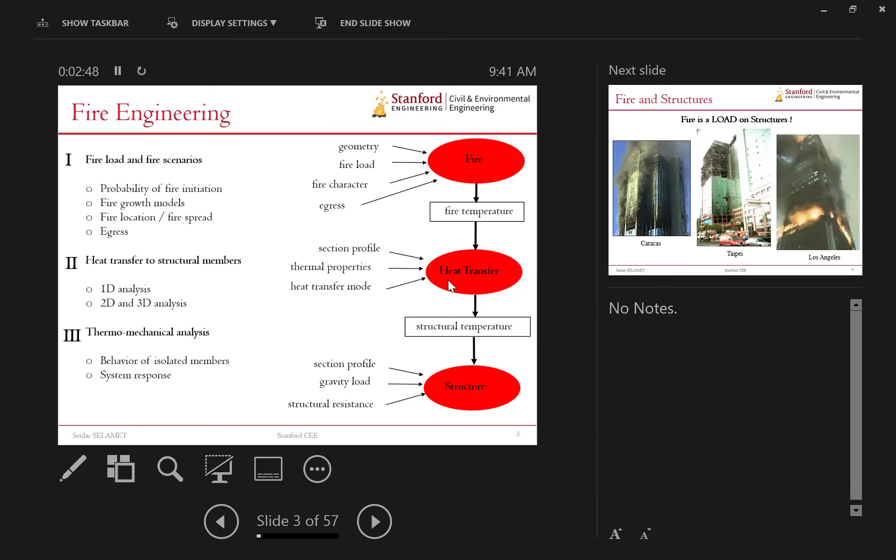So first of all, fire is a load on structures. Here are some examples of high-rise buildings. It doesn't just cause non-structural damage, it actually does cause structural damage. It doesn't happen too often, but some of these buildings end up being demolished, and it causes a big problem unless we do our knowledge check ahead of time. And what do we do about this?

Traditionally, if we think the material is vulnerable to fire, such as steel, and in this class I will be focusing on steel only because the examples will be on steel beams, we protect it against fire. How do we protect it? We make sure it's covered with a material that has very low conductivity and very high specific heat. That means it absorbs the heat but doesn't transfer it into the load-bearing structure.

But we obviously cannot do this forever. We have ratings. We can keep the temperature of the structural member below a certain threshold for 30 minutes, 60 minutes, 90 minutes, or 120 minutes. Those are usually what we call the fire ratings. We cannot do it forever, but we can delay their temperatures from elevating, even if the environmental temperatures are at quite high levels.

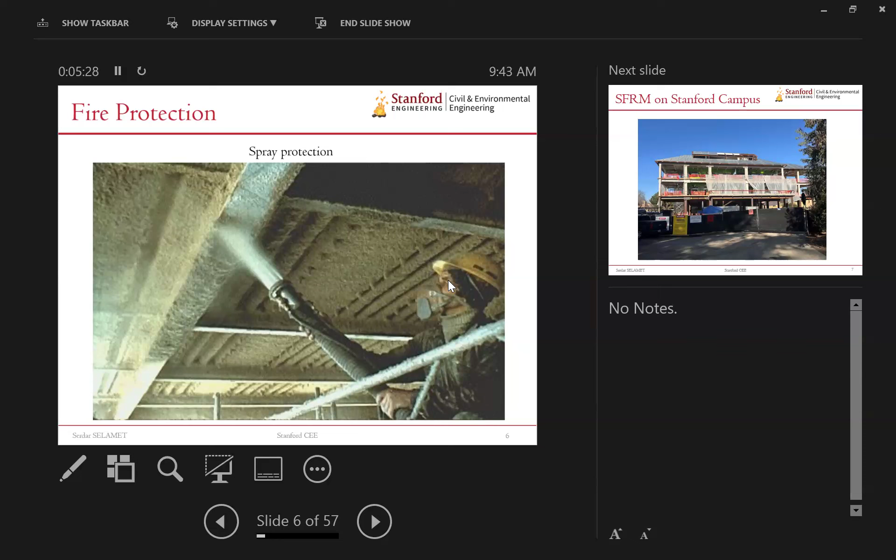I think it is this. It's nearby the Green Library. You'll see that spray protection is applied. So you can see the second and the third floors. The spray applied protection is applied to the steel members. The first floor, I'm not sure why it's still not protected. Maybe there's another occupancy type that they're thinking of, and they might apply something else there, or maybe it's just in the process. But it was a good opportunity for me to take this picture while you can see the differences. So one is a bare steel, the other one is spray applied protected steel.

Here's a zoom up to this. So you need to make sure that you measure, because you're just spraying. So you have to make sure that you're accurate with the thicknesses of that spray. It pretty much hardens right away, but it's still a semi-fluid, viscous material. So you need to make sure that the thickness is pretty much uniform across the board. And these thicknesses are determined by us, structural fire engineers. Knowing what the fire load is and what the fire rating is, we need to determine how much thickness we have to apply.

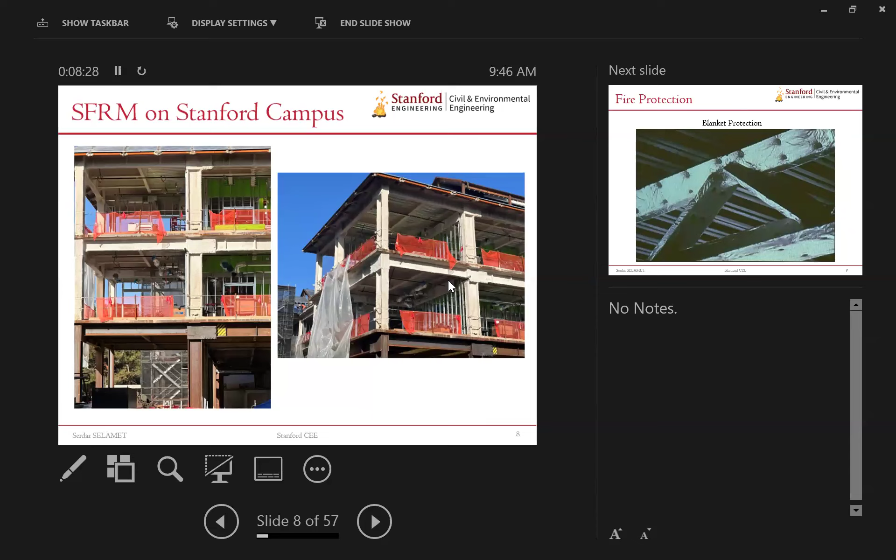And it looks aesthetically pleasing because it's just paint. It could be any color. So imagine that you would be applying intumescent paint on this bare steel, and you can keep this color and it will just look good, or you can change the color. But it is expensive, and it doesn't protect at very high temperatures. For example, if you have temperatures reaching up to 900 degrees, it actually starts to fall off. So it's not sustainable for a long time if you have severe fires.

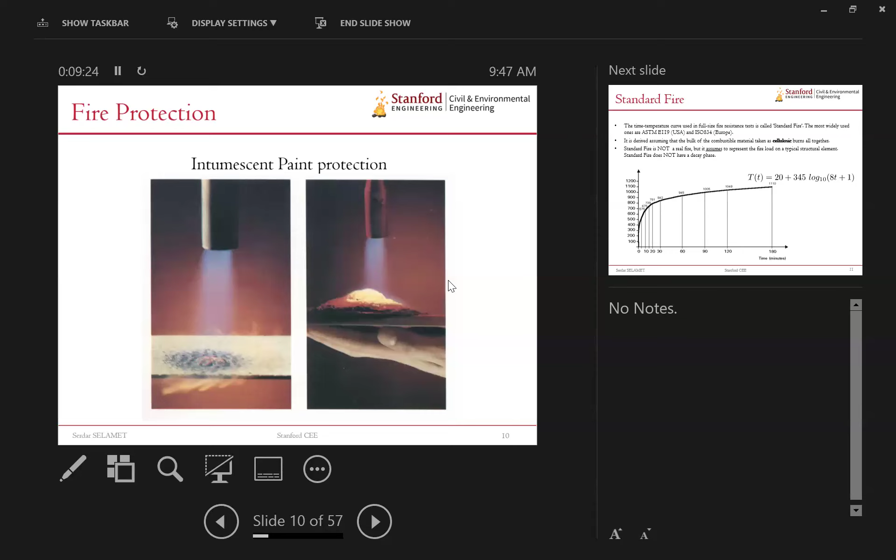Okay. And why this is popular is because in the States, for example, we rely on sprinkler systems. Sprinkler systems are supposed to extinguish the fire when it gets to very high temperatures. You can have like 300, 400 degrees, but after that, the sprinklers will get activated, and the remaining temperatures will be below what you would expect. And this is a very good material for that. But if you don't have a sprinkler system, or if your sprinkler system somehow fails and you have very high temperatures for a long duration in the structure, then intumescent paint is not the way to go.

Standard fire is pretty much what we use. It's one fire curve. The equation is written down there as well as on the board. It's a curve that we use in our prescriptive approaches.

Although what I'm teaching in this class is mostly performance-based, so we're actually doing nonlinear analysis, a performance-based approach to fire engineering, 90% of the time, for structures that you look at as a structural fire engineer, you do prescriptive design.

This fire was developed way back in the early 1900s. It's a cellulosic fire. That means you're burning wood type of material, which is combustible, and you have an almost infinite amount of fuel load. That's the reason you get a monotonically increasing fire temperature. It goes asymptotic, but it just increases maybe 1 degree at a time, continuously forever. So it's a logarithmic function.

And you can see that it's very fast; these are in terms of Celsius. You reach 500 Celsius within 5 minutes. In real life, unless it's an explosion, you will not have a fire that starts and within 5 minutes reaches a uniform 500 degrees Celsius. But the purpose of this standard fire is not to mimic what's really happening. It only tries to simulate the fire phase when it's structurally significant.

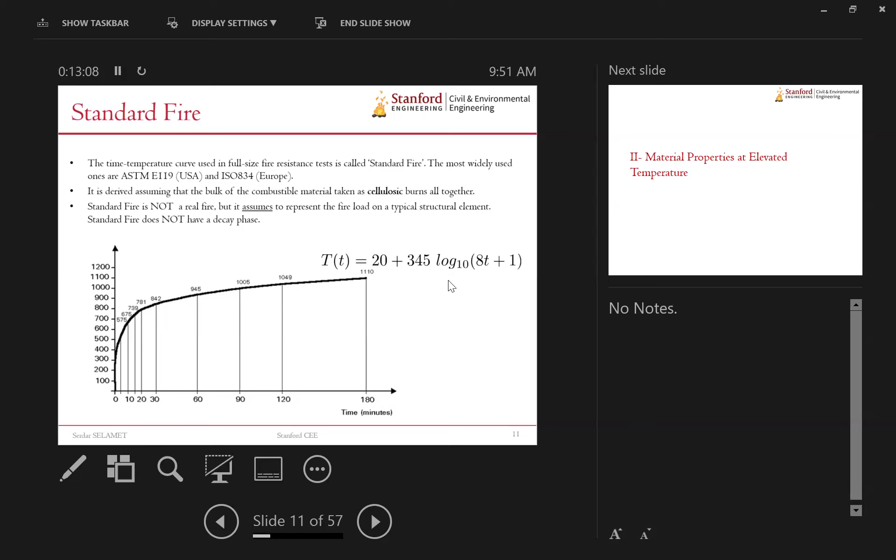So if the specific heat is high, that means you need more energy to increase a material's temperature. These are the fire insulators. So a fire protection material has to have a very high specific heat. The division is by the conductivity K. As you know, metals are highly conductive. So steel is a highly conductive material, which might not be good for fire conditions, as opposed to concrete, which is almost 1/50 as conductive as steel. That also creates other problems, but we're not going to discuss those.

But in the end, you have a material property, whether it's steel, concrete, or timber. You have a temperature change with time within the structure on the right-hand side. On the left-hand side, you have the spatial coordinates, so a basic partial differential equation of the temperature with respect to X, Y, and Z.

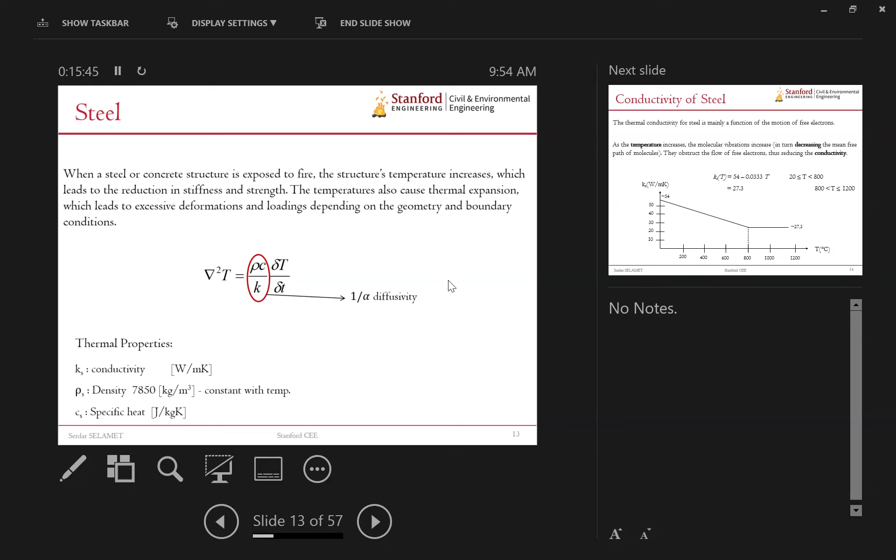So the conductivity of steel starts with 54 watts per meter per Kelvin. So again, watt here is the heat flux. You can think of this as power, okay? But in this case, it's actually energy per time, divided by length, divided by Kelvin. Of course, you can think of this as Celsius. And that conductivity will drop as we go to higher temperatures, and it will stay pretty much constant after 800 degrees. And I think this range is already a very, very dangerous state for steel to be in. So most of the time we have to keep the temperature of the steel member below 800 degrees in order to have a functioning structure.

And why is it decreasing? You can think of the heat as molecular vibrations. So as the molecular vibrations increase, as the material heats up, it decreases the mean free path of molecules. So basically, conductivity is transfer of heat from one molecule to another. If things are jiggling much faster, it actually makes it difficult for the heat to transfer. The flow of free electrons will be obstructed.

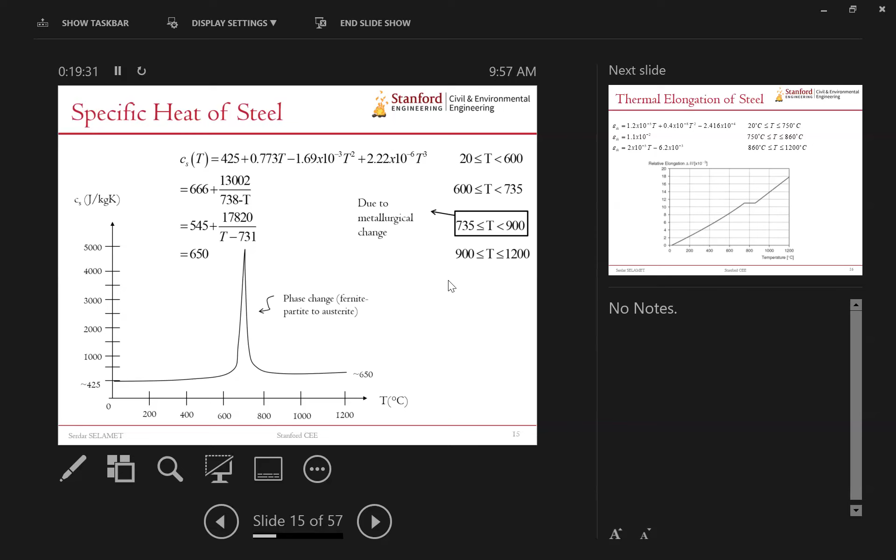Okay. Last thing I would like to talk about is the thermal elongation. This is a purely mechanical problem because this thermal elongation, which is also called free strain, if the boundary conditions are free, will not create any mechanical stress in the structure, okay? And it has to be considered in any fire situation. But if we impose boundary restraints in any degree of freedom in our structure, then this elongation will actually be converted to a stress. Not fully, depending on our restraint.

If it's a partial restraint, some of this elongation will be the deformation that you see in your structure, and some of it will be absorbed as a mechanical response. So here we call this problem thermally induced stresses, because when we have elongation and some partial restraints, we are actually increasing the stresses in the structure, which are not due to gravity load or any load that we put in the beginning. They are actually thermally induced, created by the temperature itself and the proper geometric conditions of the problem.

Okay, so it comes from the compatibility. Maybe I can just write that down too. So let's say you have an axial restraint which is full, so that means that in the end you will have a deformation that should be equal to 0 at the end of the beam. You can think of this as a beam like this. The axial deformation here, unless you have vertical deflection, should be equal to 0. So that will be compatibility.

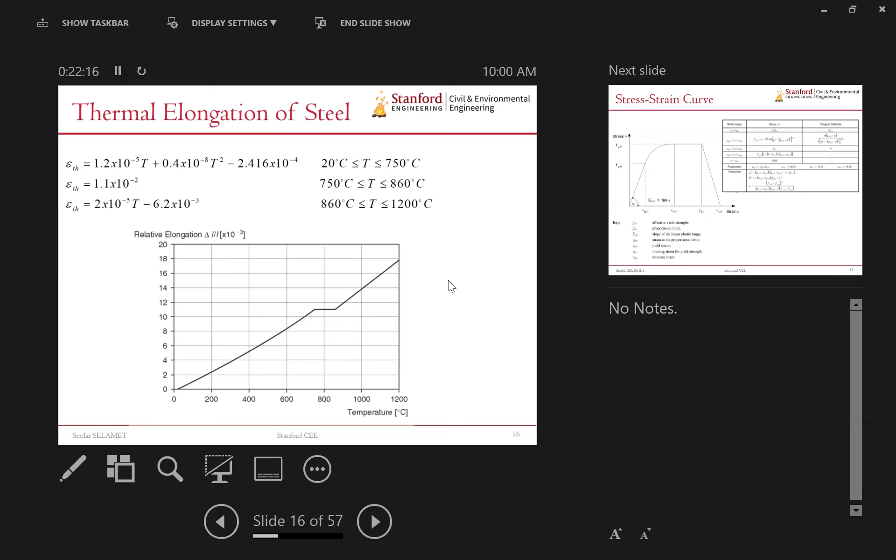And lastly, I'd like to talk about the changes in the mechanical response. Obviously the stress depends on the mechanical strain, so that also changes with respect to temperature. At every different temperature, especially at high temperatures, this is a stress-strain representation of steel according to Eurocode. We know that we can simplify this much. For example, for ambient condition steel behavior, you can think that you have a stress-strain curve which is linear up to a point. You might get elastic perfectly plastic material behavior, or some sort of strain hardening. And then at some point it will rupture, or you can also model the descending branch. So this is at ambient temperatures.

But at higher temperatures, this range where you can have constant Young's modulus will change. You might still have the same yield stress, but it will definitely behave much more nonlinear, meaning you have to solve for tangent modulus at every time step. Concrete behaves like this, it's a lot more nonlinear in terms of stress-strain behavior compared to steel, but steel also becomes quite a difficult material to solve for every time.

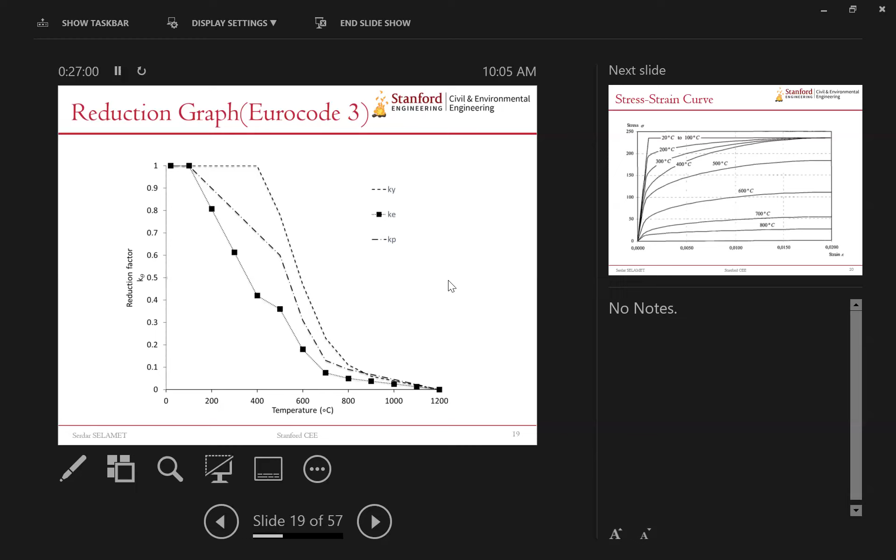You see what I mean? But after that, it becomes this elliptical shape. So the tangent modulus changes every time. So you need to make sure that you capture that tangent modulus.

So when you plot the stress strain curve for different temperatures, assuming that it's behaving elastic perfectly plastic, well, in reality, there will be some strain hardening, but let's assume it's behaving this way. Up to 100 degrees, nothing really changes in terms of stress strain behavior of steel. But as you go higher up, you can see up to 400 degrees, you have this nonlinear shape, but then it reaches the same yield stress level as before, but then it drops significantly.

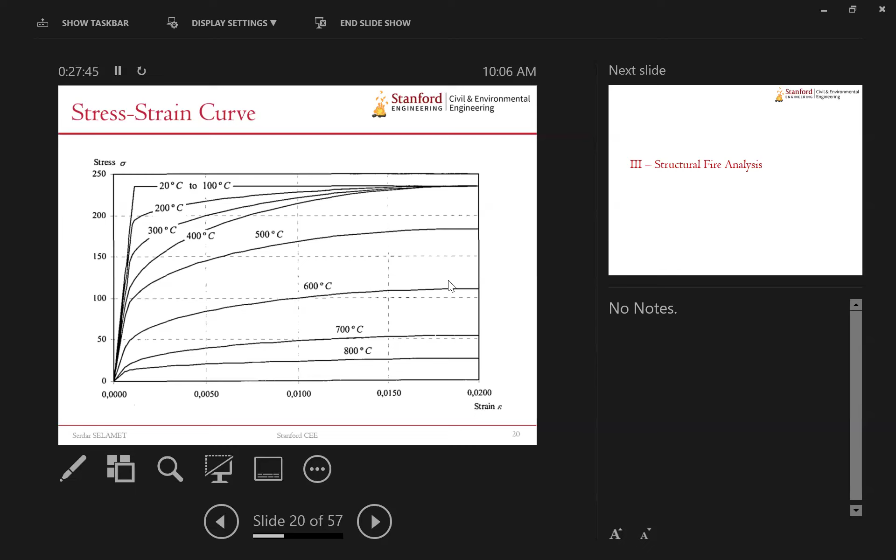So you're dealing with a different material at every time step. That makes structural fire performance analyses quite difficult. Even the simplest versions that we will do here, a simply supported beam, an incredibly simple structure, still become a highly nonlinear problem.

So here is the thing that I try to mention. This part is also related to the P delta effect. So we have a very highly nonlinear material. We have a behavior that is composite in nature. We'll talk about that, but maybe it's something that I need to touch upon right away.

So imagine that this is your steel cross section, and you're exposing it to heat, and you would expect, because there's concrete on top, that the temperatures here will be lower than the temperatures underneath. So when these temperatures are lower, this material, mathematically speaking, is a different material than this, right? So you are essentially solving a composite cross section. Even if it's homogeneous steel, if it has different temperatures across the section, you're solving a composite material.

And that's the reason we will always talk about the fiber approach, trying to divide this cross-section into different small, preferably rectangular sections. At each little section, we assign a different Young's modulus, a different stress strain behavior. Okay? And this is called the fiber approach.

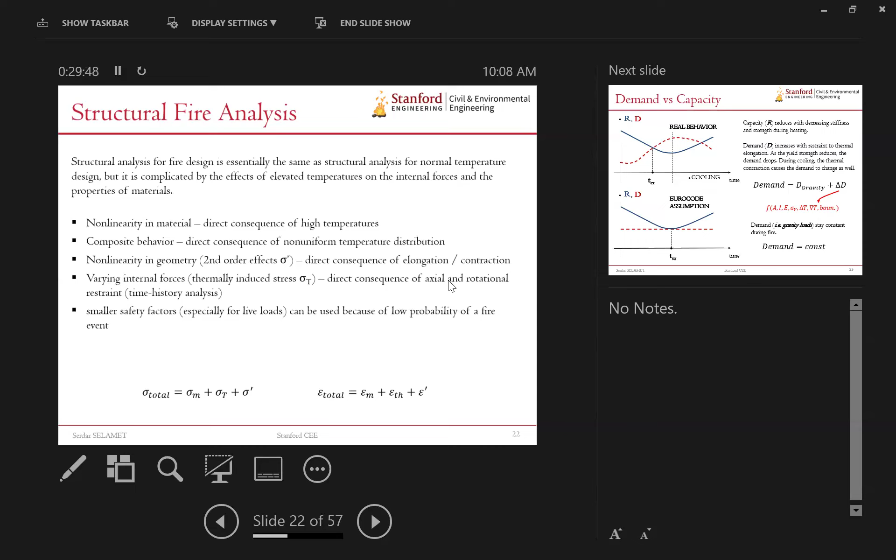Okay, let me talk about demand versus capacity. So here things get quite interesting. The blue curve is your resistance. This could be the resistance of one element, or of the entire structure, depending on how you look at it. But we know that when we have a fire, the resistance will drop because the yield stress, as well as the stiffness of the material, let's say it's steel, drops.

Your resistance could be related to yield, a purely strength problem, or it could be a stability problem, which is Young's modulus. It's related to stiffness rather than strength, right? So whatever your resistance is a function of, it will drop when the structure is exposed to fire. The x-axis here is time, but as time increases, the temperatures also increase. So this is the blue curve.

But when we have applied enough heating and then the fire is extinguished and the structure cools itself off, a very slow cooling phase, for steel and many other structural materials we want the strength and stiffness to be regained, and that's usually what happens in terms of material. So we will get an increase in the resistance. Probably not back to normal, because there will be some permanent deformations and damage, but we see this pickup.

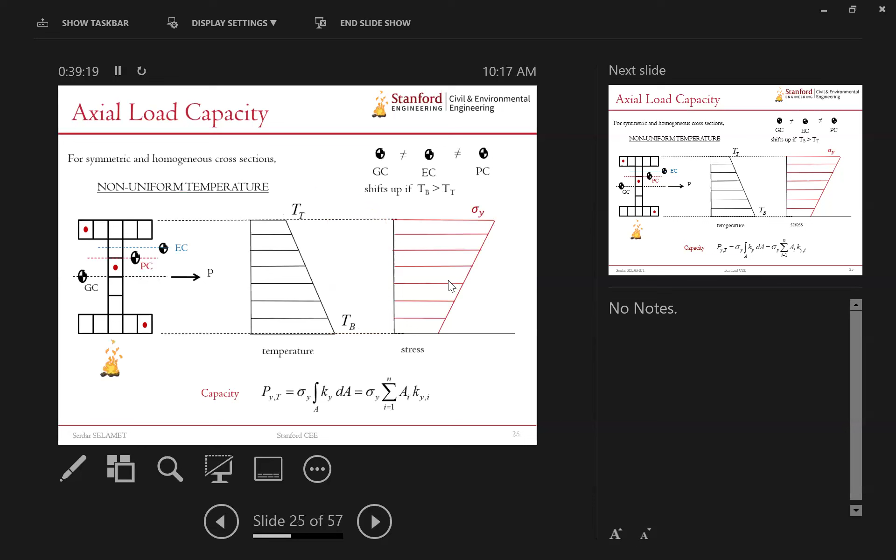For non-uniform temperature distribution, assume the bottom flange has a higher temperature than the top flange. Let's assume it's a linear variation; it could be anything. But the stresses will be mirroring that, right? So it will be reversing, because now low temperatures are equivalent to higher stresses, or stresses which are not reduced as much, and high temperatures are equal to lower stresses. So you have higher strength in the cool regions than the hot regions, okay? So it will be mirroring this temperature distribution.

And let's look at the capacity. The axial load capacity with respect to fire is again, the yield stress could be kept outside. This could be the yield stress at ambient temperatures, but in this integral, you cannot keep the Ky outside because it will be changing at every different fiber that you deal with, okay? So you can make this integral a summation because you're dealing with fibers, which hopefully have the same area. So you can just sum them up instead of running the integral. So the fiber approach gives us this formula where you're basically taking the weighted area of each strength reduction into the summation. Okay. So you need to do this calculation.

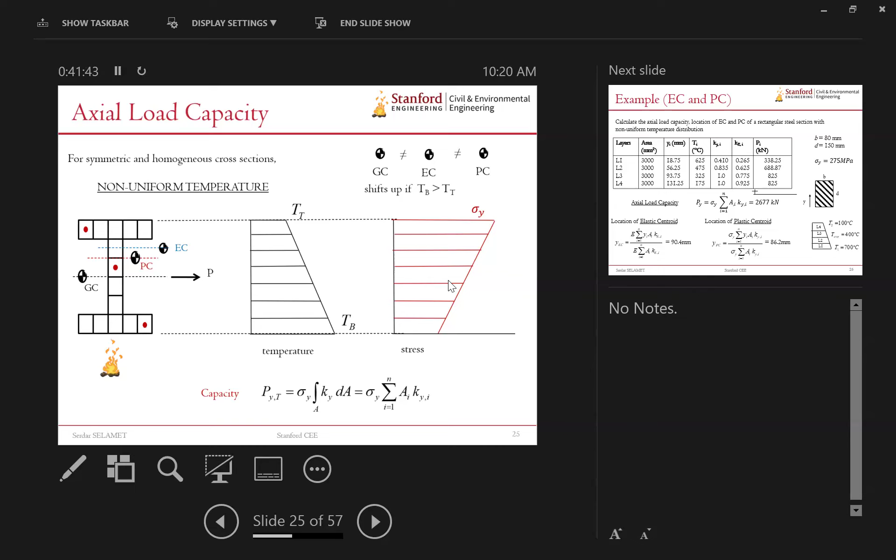Let's do a very simple example. We'd like to calculate the axial capacity, the location of the elastic centroid as well as the plastic centroid of a rectangular steel section with non-uniform temperature distribution. Assume that we don't have this I-beam shape; let's assume we have a rectangular solid section. So the depth is D, width is B. And the temperature is 700 degrees at the bottom. It's composed of 4 layers or 4 fibers with equal area. And on the top, we have a temperature equal to 100 degrees. So the temperature gradient is quite high here, as you can see.

So the axial capacity formulation is a summation, and you can just put this on a spreadsheet. It's quite simple. You put the areas of each fiber, you put their locations with respect to a reference axis. In this case, the bottom is going to be the reference axis. And these are the locations of the centroids of these layers. So the first location will be here, the second one here, the third one here. So you're looking at the geometric centroid of these fibers.

And next, you interpolate the temperatures, assuming that the fiber will have a constant temperature throughout. So there's an assumption here. And then yield stress reduction as well as stiffness reduction will be calculated separately. And then you calculate how much axial load one fiber can carry, and you just add them up to get the entire capacity of that cross section. And we are assuming the yield stress is equal to 275 megapascals. Any questions with respect to axial capacity?

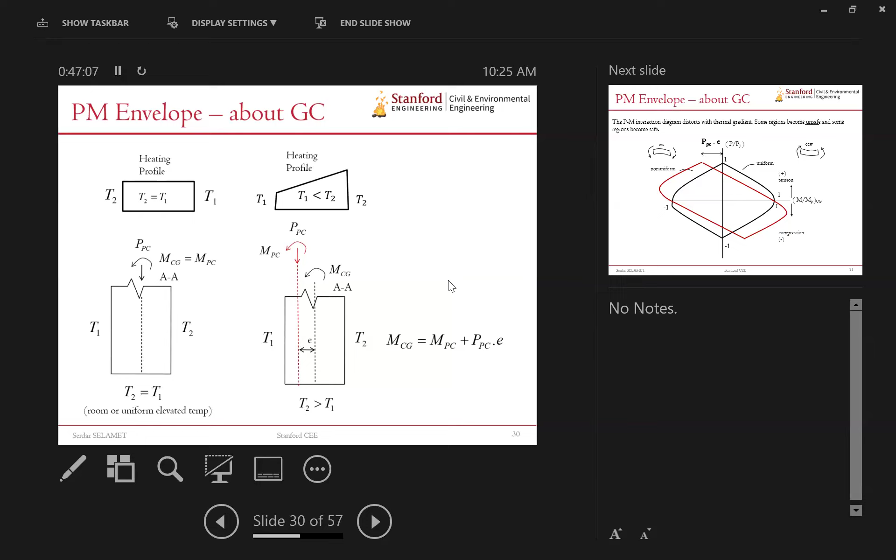Most structural analysis programs calculate the moment at the geometric centroid of the cross-section, because that's the one that's not changing throughout the entire analysis, unless you're, you know, changing it, adding a plate to it or something like that. So, you will see in your structure behavior, when you look at that envelope, that additional moment decreases the capacity, or it shifts the PM envelope to a different place whenever you have non-uniform temperature distribution.

So this black PM envelope is the one that's at ambient temperature, or any temperature that's uniform. It could be 400, 500, because you can see it's normalized. So it will always stay in the same shape if we have uniform temperatures. But if you have a non-uniform temperature, you have this extra moment that's being induced to the structure. So this envelope, which you see in red, will actually shift, or we call it distortion of the envelope. So what does it entail?

So if you have a PM combination of your structure happening right here, okay, according to your traditional design, you have to say this failed, right? It's outside of your envelope. But essentially, if it's a non-uniform temperature distribution, it actually has not failed. It has some spare room. Vice versa, if your PM combination is right here at any instant of your analysis, according to your traditional design, you're safe. But actually, in reality, you're not. You have already failed.

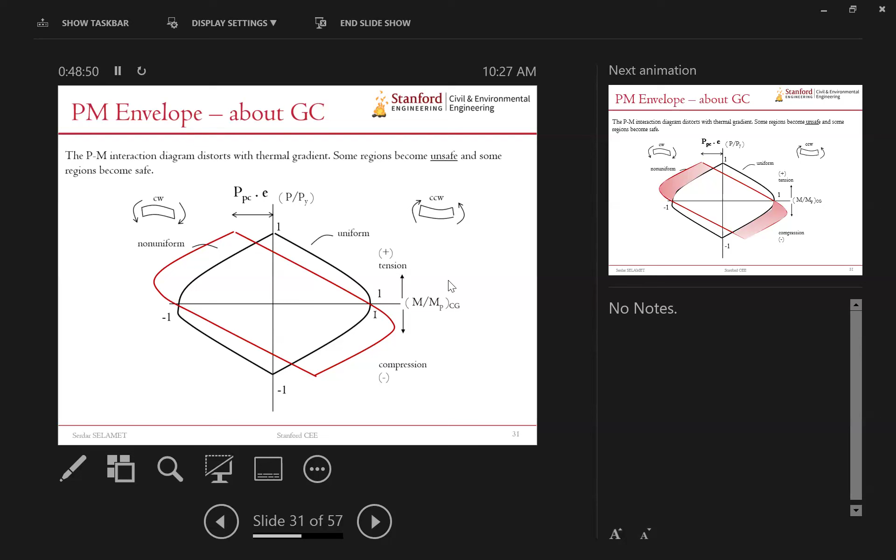So when you're designing your cross-section, especially one that could develop non-uniform temperature distribution, you have to take account of this shift. And that shift is changing at every time step. Or let's say it that way, at every different temperature level, the thermal gradient might be different. So this shift is actually happening at every time step.

All right. Let's go to OpenSees. OpenSeesPy, I've seen Francisco's talk last week, and I think you guys are now familiar with much more complicated structures and distributed plasticity and analysis procedures. Things that are really different in this simple fire problem are these four following things.

One is the material. So instead of Steel01, right now in OpenSeesPy we have only one available. There are actually multiple things, so I'll talk about that later. But Steel01Thermal is the material library that we built so that it takes account of that change in the stress-strain curve of the steel with respect to temperatures. Fiber is there. FiberThermal is the one that we will use that takes account of the Young's modulus and strength of each fiber and calculates it for each fiber.

Element type, displacement beam column is there. We just added thermal. That takes account of the temperature effects. And lastly, in loading conditions, this is brand new. So instead of applying a typical load, concentrated load, moment, distributed load, you apply a temperature.

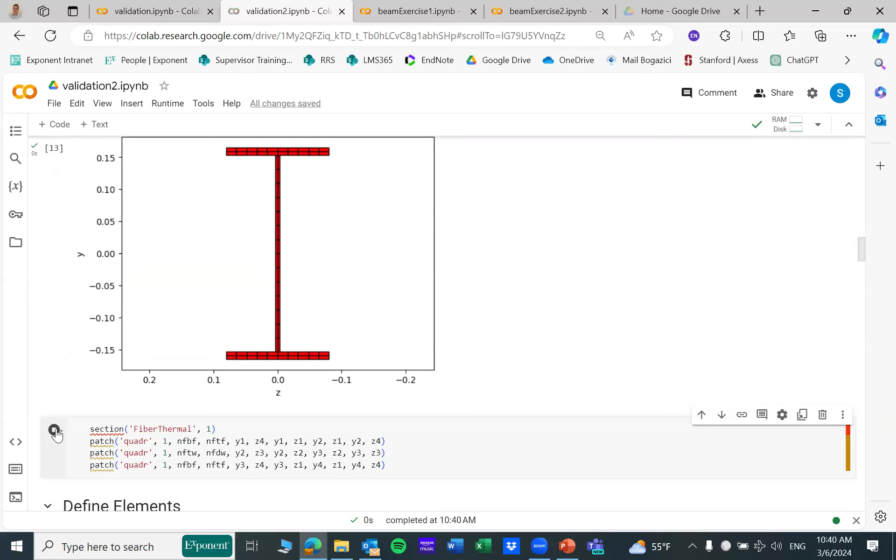Fiber section. Okay. Now, let's apply the load without applying any temperature to it. So I'm applying a load that is, basically, if this is a pin roller, I'm applying load here in tension. Okay, that's all I'm doing. I'm incrementally applying that load. I should get a quite linear response. And here we go. It's a linear response with some strain hardening.

Okay, so now I'm gonna save this. And I'm gonna go back, and I might be doing too manual, but I didn't figure out how to do it otherwise. I'll go back and rerun everything. This time I will skip that gravitational loading in the beginning. I will apply the temperature first, and then apply that tensile load, and see if I'm doing this right. The stress strain behavior or load deformation graph that you see will be different this time.

So I'm skipping this loading, and I'm just jumping to fire loading. This time I'm loading up to 400 degrees. I don't want to load at 1000 because then I won't be able to carry any load. And then run the analysis, and you can see now my thermal elongation plot will be only up to 400 degrees. It's still thermal elongating, still free restraint. So I'm not building any stress first. Now I'm applying the load.

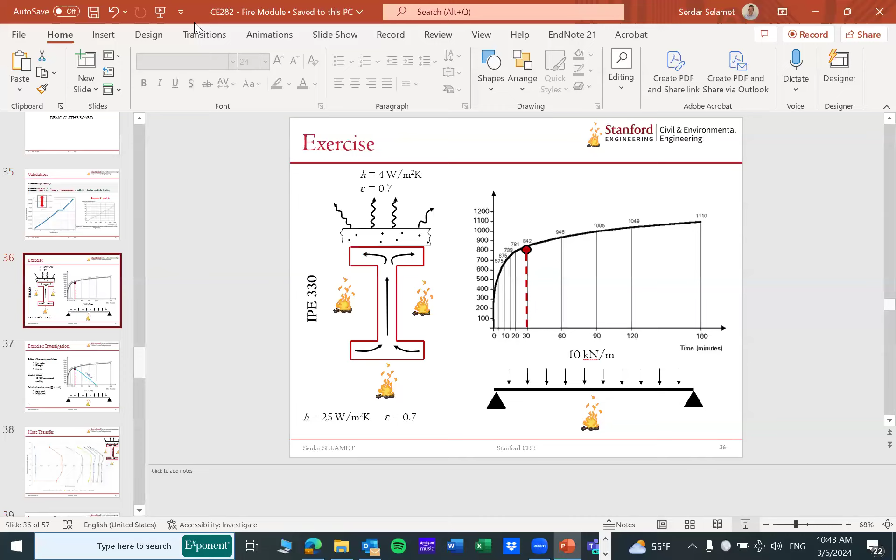Okay. Let me go now to the main exercise. This will be a somewhat simplified form in terms of temperature development as your assignment. We will go through this together here too, but the coding would be up to you. We'll share validation 1 and 2, and by tweaking a couple things there, you will be able to run this analysis. What we're dealing with here is a simply supported beam composed of 10 elements, which has 3 different boundary conditions: pin roller, pin, and fixed. Quite easy to do this in the script. Subjected to 10 kilonewtons per meter uniformly distributed load, subject to the fire underneath.

The cross-section that we're dealing with is IPE 330, which is the same cross-section that you dealt with in the validation part. So the cross-section is not changing. We assume that there is concrete on top, which is typical for composite beam construction. That concrete on top will create a non-uniform temperature distribution across the cross-section, because it will act as a heat sink, and that will lead to lower temperatures in the top flange than the bottom flange.

In reality, OpenSees fire module, with the Tcl form coding, can actually do the heat transfer analysis as well, store all the temperatures in each fiber, which could be temperature and time dependent for any fire curve, and then apply it to the structural analysis program. But in OpenSeesPy, we're not there yet, so it's going to be a simplistic version. We're going to take the results from the Tcl code and simplify it. I'll show that to you.

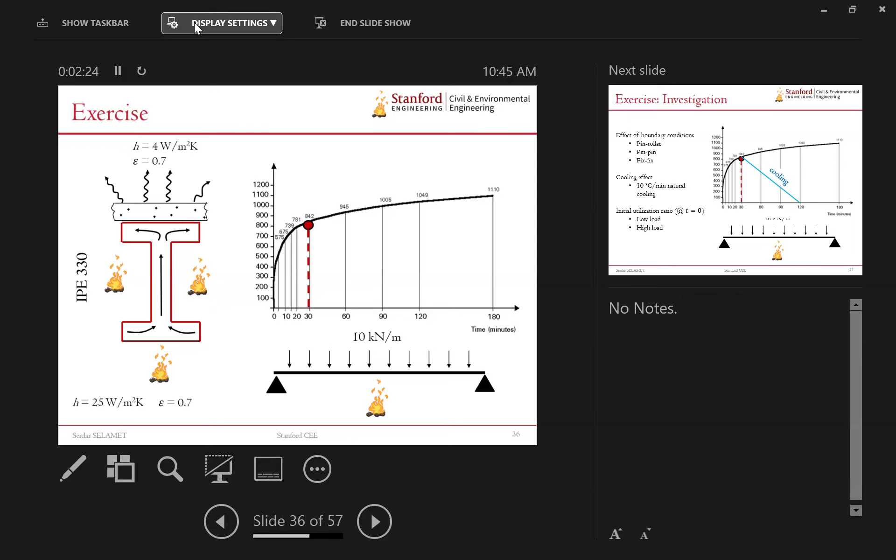But now let's assume that we are subjecting this beam to the standard fire up to 30 minutes. So up to 842 degrees Celsius, and in a nonlinear fashion like this. So it will be a different time step at each step.

And then we look at the effect of boundary conditions. We're looking at the cooling effect. Once we heat up to 850 degrees Celsius, we will let it cool for another 90 minutes and see what kind of things we observe in terms of 3 different engineering parameters.

One is the axial load development in the beam. The other one is the moment at the midspan over here. And the third one, or the first one, is going to be the vertical deflection at the midspan. So we're going to look at these 3 different parameters.

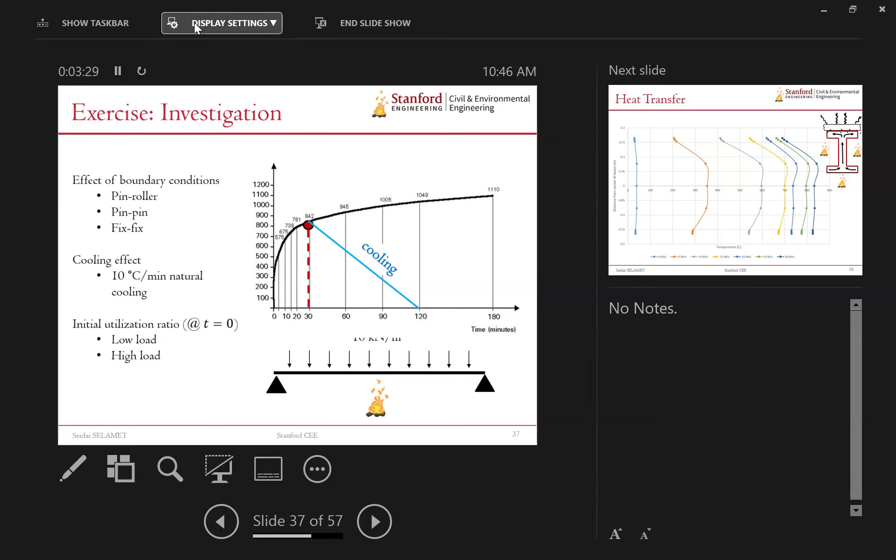And we're also going to look at what if, instead of 10 kilonewton per meter, which is a 20-30% utilization ratio of this beam, we apply 1/100th of it? So we have a much lower gravity load to begin with. And this could actually be detrimental to the stability of the structure, because you're compressing it and it's almost straight. So you're not getting these vertical deflections to offset that compressive load. We'll talk about that too.

So first, the heat transfer analysis. This again could be done in OpenSees, a different executable file that you can get from the website. I'll talk about that as well. But the evolution of the temperatures up to 30 minutes is shown here with the cross section. So we start at around 20 degrees Celsius, and then at 5 minutes, we have a temperature distribution throughout the fiber like this.

Lower temperatures on the top flange and higher temperatures on the bottom flange, and actually high temperature in the web as well because the web is very thin. And then we get up to 10 minutes, 15, 20, 25, and 30. So this is sort of the last phase of the heating. Any questions here? So you can run a typical heat transfer problem either in OpenSees or anywhere else and get these temperature gradients, so to speak, for each fiber in the beam.

Serdar, just to emphasize for the students, that temperature curve on the whiteboard over there, if you think in terms of other loading cases, that's like the applied loading. In fact, the Eurocodes have it, and in the US it's not in our codes, but there are guidelines that say you take the heat content of a room, what can burn, and information on how open the circulation is, how much air there is, and so forth. You can develop that time temperature curve for the temperature in the room.

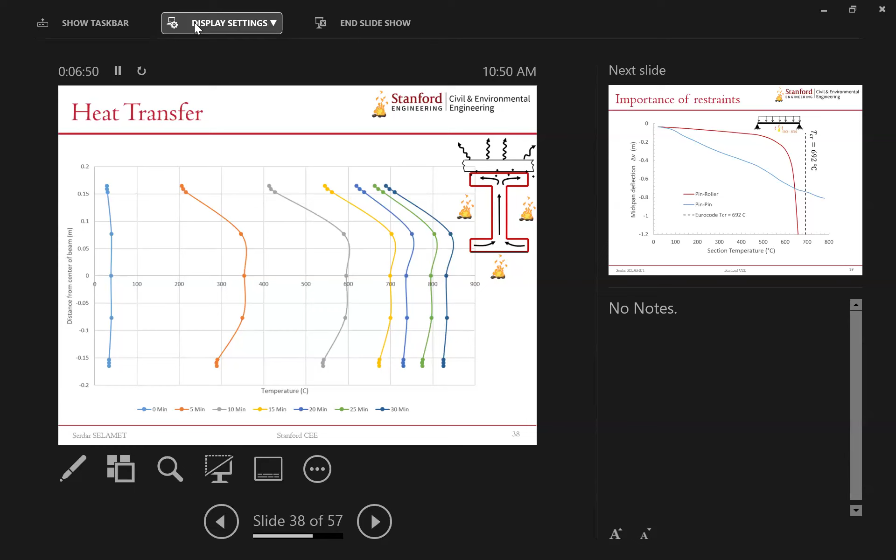Let's look first at the effect of the importance of restraints. So if this was a pin roller beam subjected to 10 kilonewton per meter load, you would expect that at some very high temperature, the resistance is going to drop and intersect the demand, which stays pretty much constant, right? 10 kilonewton per meter. And the beam is going to fail in runaway.

And that's exactly what's happening when you look at the red curve. It just does this with a section temperature. This is the average temperature of the cross section. As it increases, the vertical deflection at the midspan is increasing, and then at some point it just goes boom, and that's when the OpenSees analysis actually stops to converge.

And Eurocode, just as a side note, you can do back of the envelope calculations and find out the critical temperature to be equal to approximately 700 degrees for this particular problem, the cross section and the length. And you can see that the analysis is not too far off, or vice versa. The code is not too far off to calculate that runaway behavior.

But when you change only one thing, from pin roller to pin on both boundaries, now it can develop compressive stress inside, but also if it goes runaway, it basically stops this beam from failing in runaway motion because it's being held by these two supports now, axially and vertically, translationally. So you can see that you get more deflections because there will be a compressive force developing, and it's actually pushing the beam down.

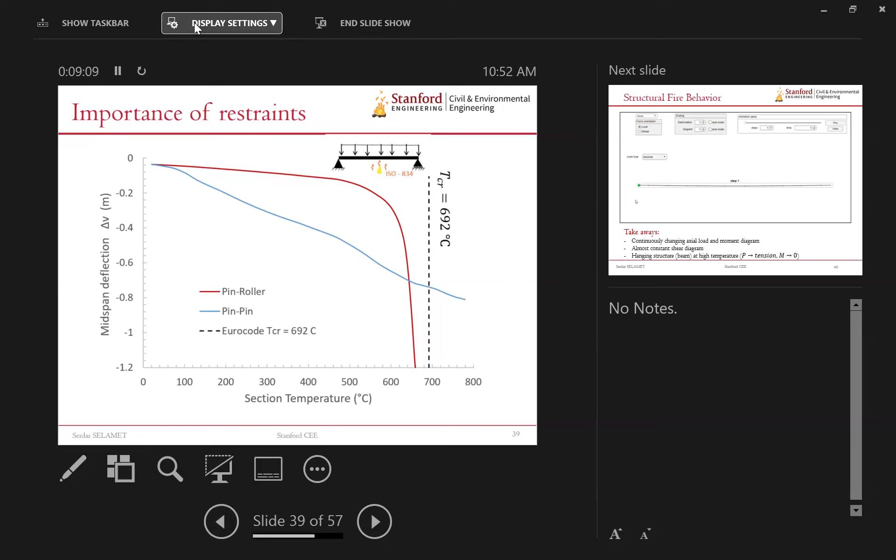More vertical deflections, but in the end, it will continue up to a point where the material cannot carry anything. The material properties drop significantly, but it doesn't fail. Okay, so changing one little thing, just the axial restraint in the beam, can actually make the beam stay longer as long as the connections are strong, which also is a big problem in this type of analysis.

This is just to show you the change of the deflection, axial load, as well as the midspan moment diagram throughout the entire beam. This is thanks to Brian, who's a graduate student here. He had this code for his own research that can collect the history of the axial load, moment, whatever internal force you have. So I gave him the results that I got for this problem, a pin beam with 10 kilonewtons per meter load subjected to fire, and he was able to plot the changes, and there will be some takeaways from this.

So first we'll look at the deflection. He just made a video of it. So as time goes, the beam will deflect, as you can see. It's held again by these two supports translationally, so it will deflect a significant amount. P-delta effects are there, and in the second part you will see the axial load history of the beam as it expands. And mind you, this is all heating. Nothing is cooled here. Everything is up to 30 minutes of heating.

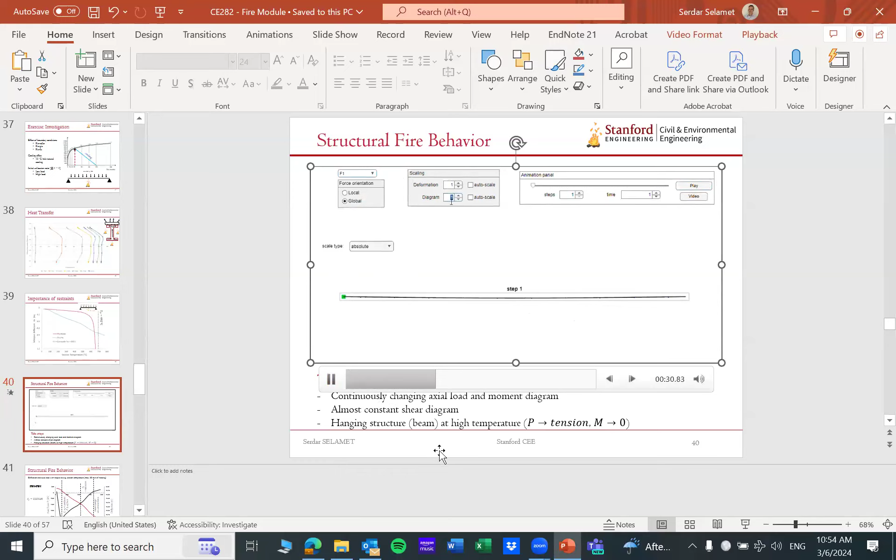And you can see here it starts with a very large compression, and that compression force gets to zero, and then you get some tension in the beam. That's interesting, right? It's quite counterintuitive if you think about it. You're heating the beam, but the vertical deflections are so excessive, more than the thermal elongation can catch up. So you're developing catenary action in the beam, into tension. And you're still in the heating.

Now, the next step would be looking at the shear diagram of the beam. You know this is a uniform distributed load, so you have a linearly changing shear diagram. You can see it's not changing at all because the gravity is not changing. The shear diagram will stay pretty much constant throughout the entire fire duration. This might not be the case for a column.

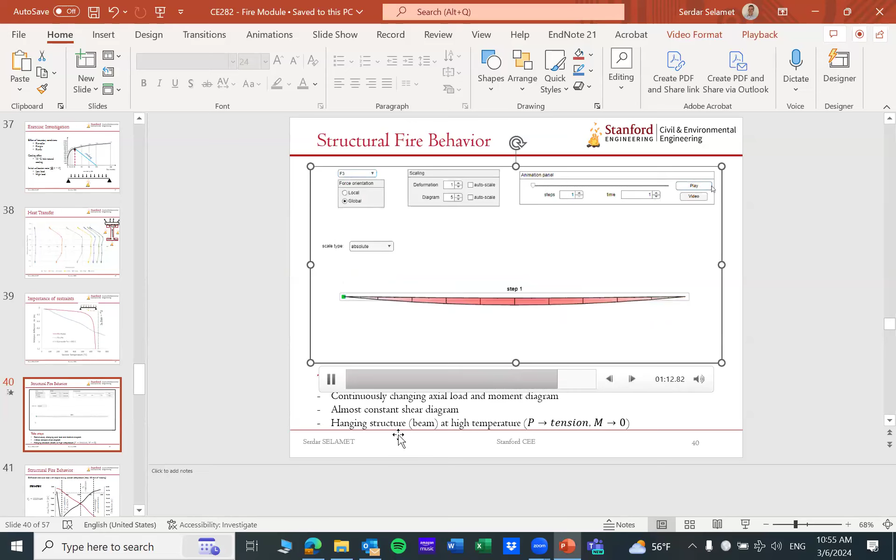The third one that he looks at is the midspan moment. Obviously, wL squared over 8 in the middle, and you can see the moment is also reducing almost to zero. So what does that mean? The beam acts like a cable. Almost no bending, and it's in small tension. And this happens during only the heating phase, not cooling. So the beam starts to hang from its supports, and that makes the support conditions very, very important.

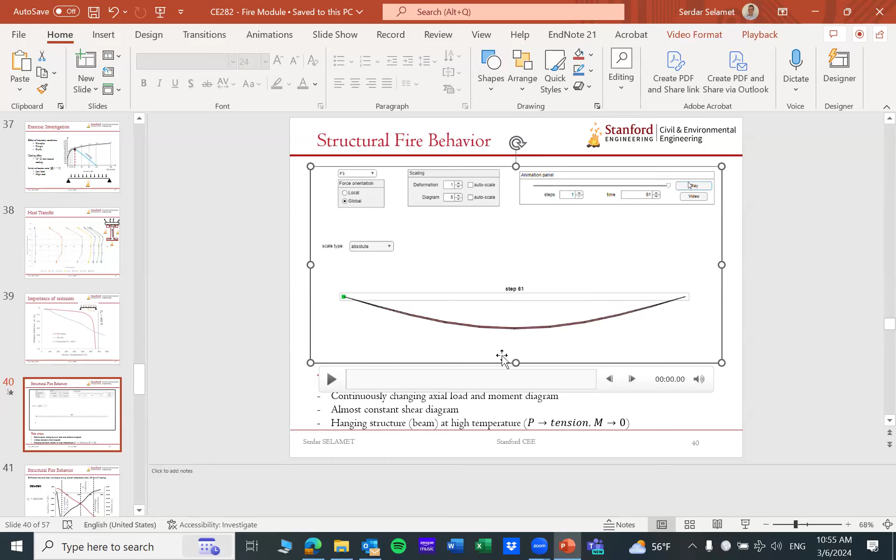You're modeling this. Is this what you're modeling with one element? Oh, these are 10 elements. Yeah. The validation was just one element. Now we're looking at the entire span, and we're using 10 elements here.

It just occurred to me, the shear diagram. If you think about a catenary, what was shear in a horizontal beam, the vertical component becomes part of the tension in the catenary. So I would think that the shear would similarly follow the moment and go to zero. I mean, you still have that load over the span, but just as the moment disappears, the shear would similarly. I think the diagram shows the global.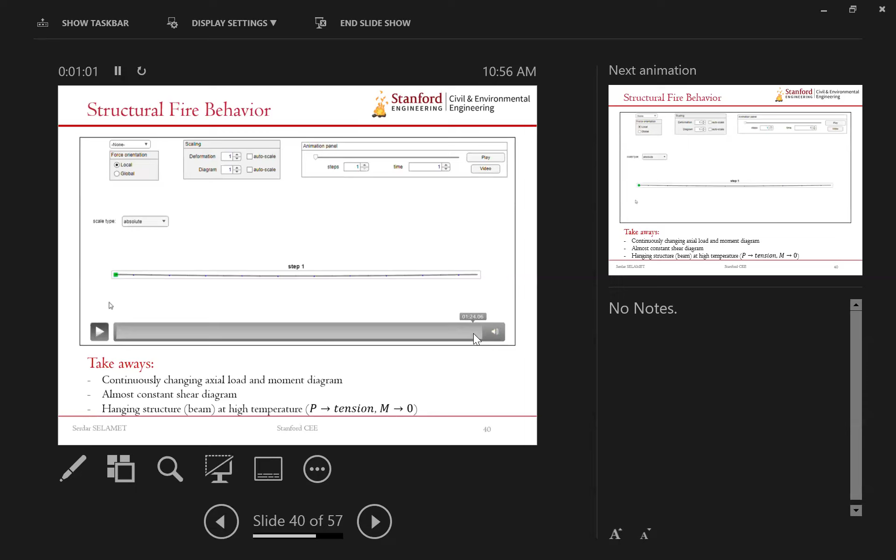So I think he makes a tick here to global. I believe so. Okay, yeah, it transformed it, just to show. Because you're right, the deflections are so excessive that you need to look at it locally if you just want to understand the capacity. But just to show overall, the shear is not really changing. We change it to global. Yeah, if you think of the shear as being a result of the vertical component of force, that's not changing. Yeah, that's good.

We did a little bit of thermal loading in linear analysis class, and a lot of our intuition changes. Exactly. You got to think outside of the box, really.

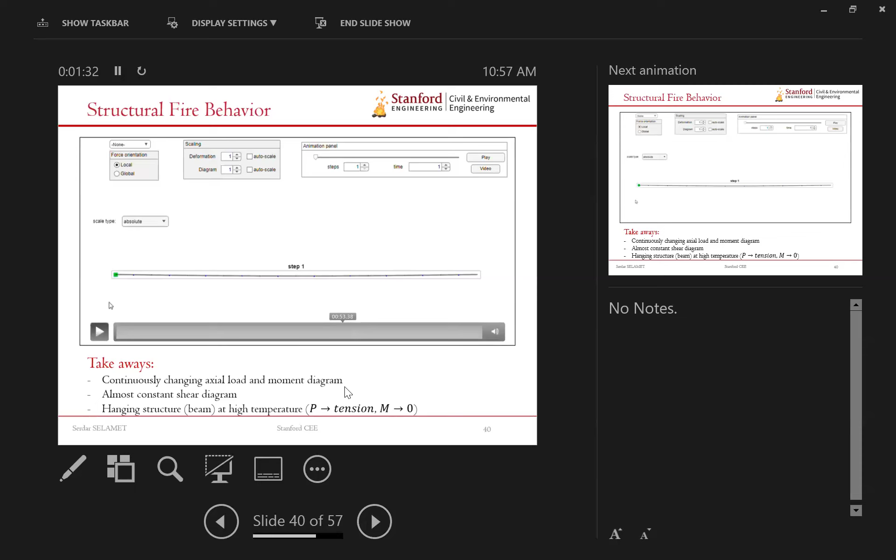All right. Let me see how we're doing in time. I think we are going to be okay. If not, some of the coding might go into the second class.

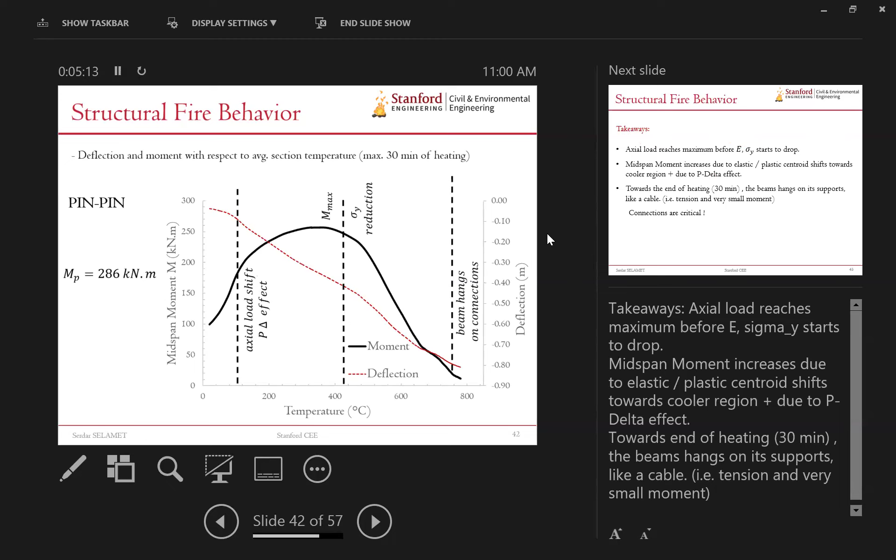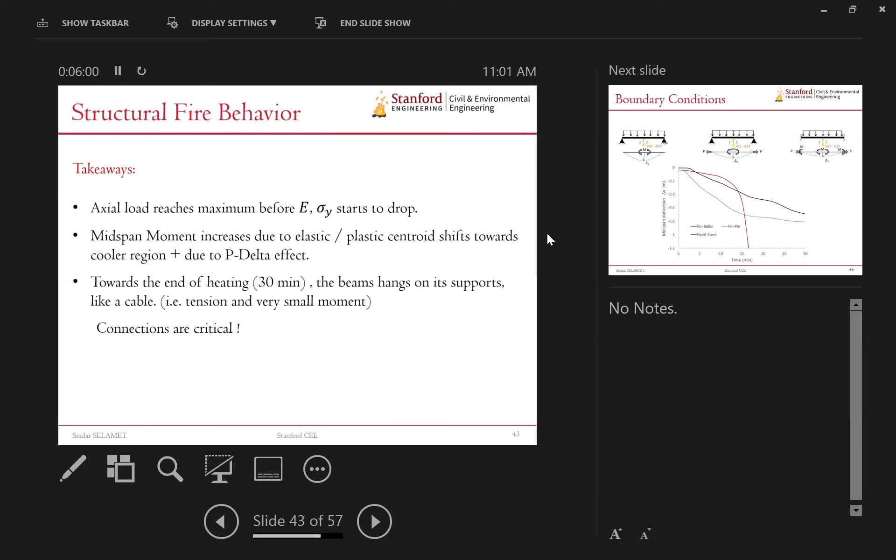The takeaways from this: axial load reaches maximum before Young's modulus or yield stress starts to drop. So axial load is a geometrical problem in the beginning, how things actually deflect vertically, rather than a mechanical problem. The second one is the midspan moment increases due to elastic or plastic centroid shifts towards the cooler region, plus the P-delta effect. Those two things act together to add additional moment to the midspan, which is the worst case at the midspan. Towards the end of the heating, the beam hangs on its supports like a cable. Tension is there, and also a very small moment, so no bending. And here the connections become quite critical to design.

So boundary conditions. So we already went through the blue one, the pin, as well as the pin roller. When you do fixed, you get a smaller deflection, which is understandable because the rotational capacity here is much more. The resistance in rotation is much more. That decreases the deflection that this beam is exposed to at the midspan.

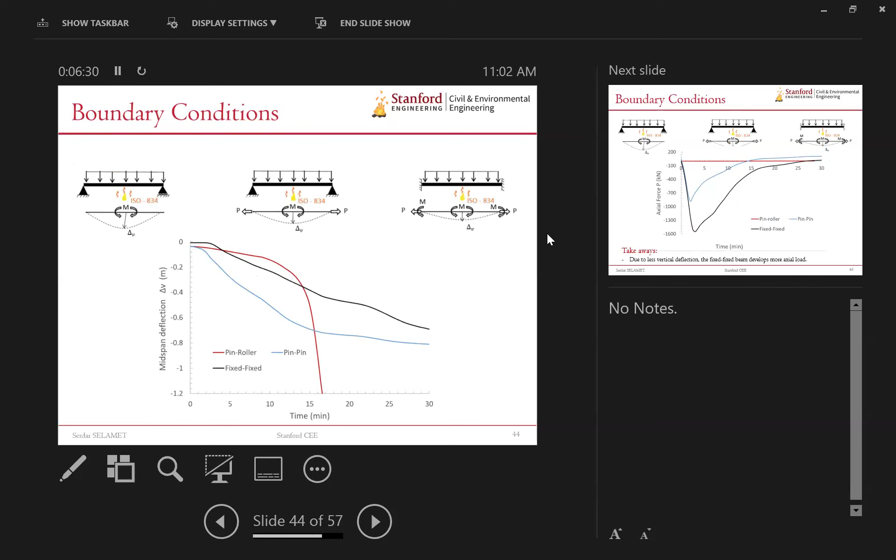In terms of axial force, because the deflections are limited in the fixed beam, you get a much larger axial force. Still not there in terms of yield stress, but it's there. You see, it's much more. So the takeaway from this would be, due to less vertical deflection, the fixed beam develops more axial load. And you can see that there's no axial load in the pin roller, as expected, right? The pin roller is free to expand.

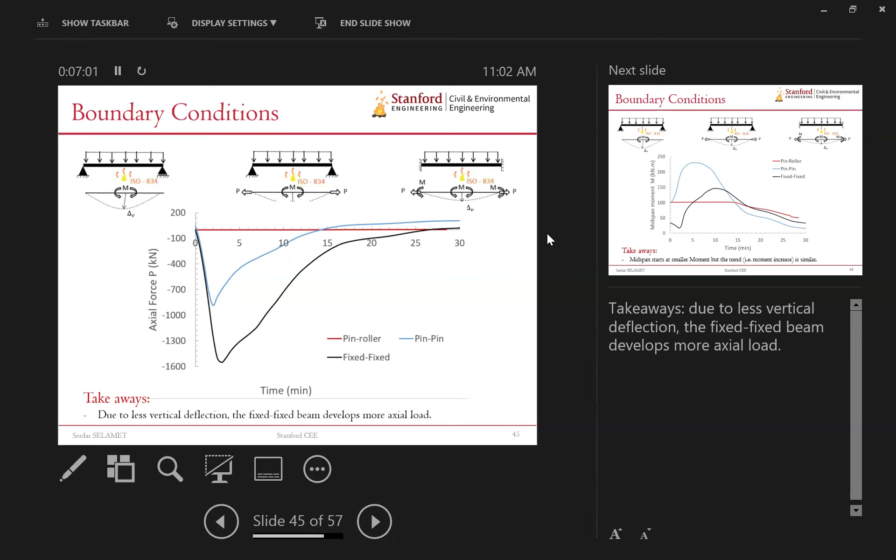When you look at the moment development at the midspan, you see that we started at 100 for pin. Obviously, the midspan moment for a uniform distributed load of a fixed beam is equal to WL squared over 24, right? And WL squared over 8 is 3 times larger. So that's where you see in the beginning the difference to start with.

But then you still get that increase of the beam midspan moment, but this time, obviously you don't reach as much of a midspan moment because initially you started with a smaller bending moment. And then when you look at the pin roller, you start at 100 as before. That's not changing, but it stays almost constant until runaway behavior occurs, because the gravity is staying constant. So you don't have these thermally induced moments that you experience in the restraints.

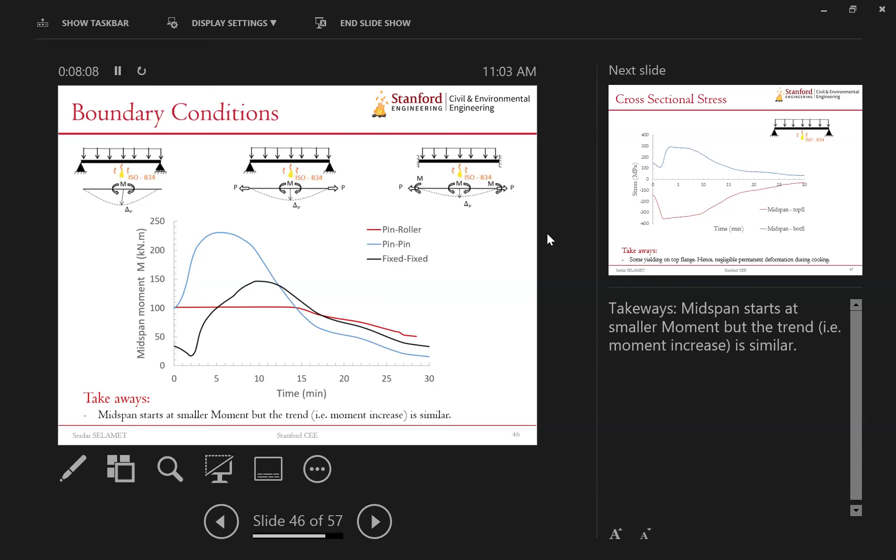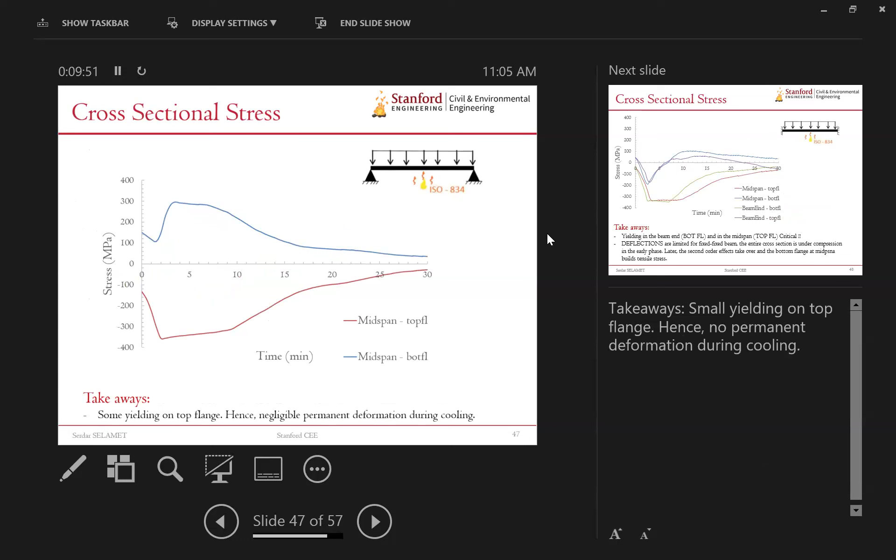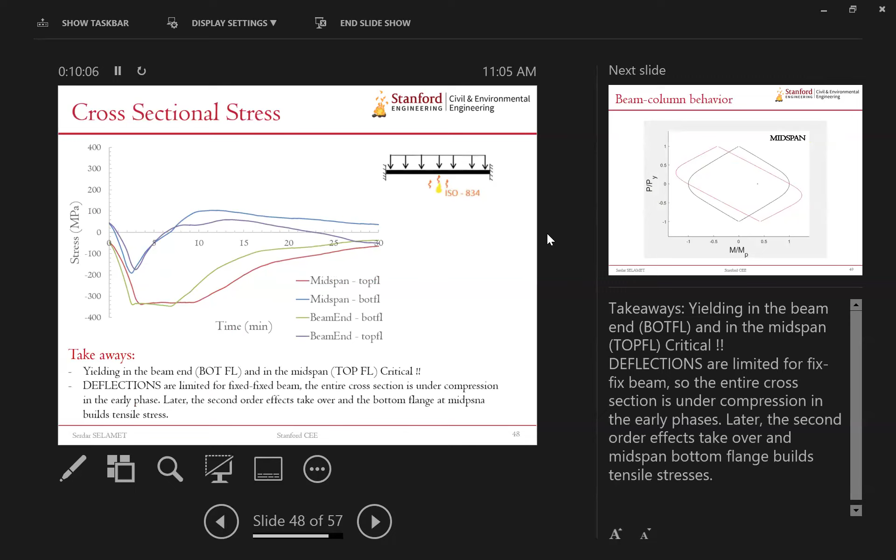Bottom flanges are in tension. If you look at this here, the bottom flange is in tension because the moment is counterclockwise. But here they actually get into compression, all of them, because the axial force dominates the stress behavior in the cross section. So you still get moment. There's a difference, but it's always in the compression phase. This is something that is also quite important to take away.

3 different videos that I will show, and start with some of the assignment work on the board. So here's the thing that I previously talked about. Here's a PM envelope. So what we're going to do here is look at pin roller, pin, and fixed beam. And we're going to look at axial load anywhere in the beam, and the moment at the midspan. And we're going to record those P and M at every time step as this little dot, and see how that progresses within this PM envelope.

Again, the black one is ambient. And the red one is sort of the end of the 30-minute heating, the end of the analysis, okay? So we're going to see if these dots are crossing the border, and if they do, does it mean it fails, or vice versa? So this is pin roller. What do you expect the moment to be at pin roller? Any guesses?

We apply a load to a pin-roller beam. What happens to the moment at the midspan? It stays constant, right? What is the axial load in the beam as the fire develops in the beam? It's a pin-roller. Zero. Axial load starts from 0 and is always 0, and then the bending moment will be...

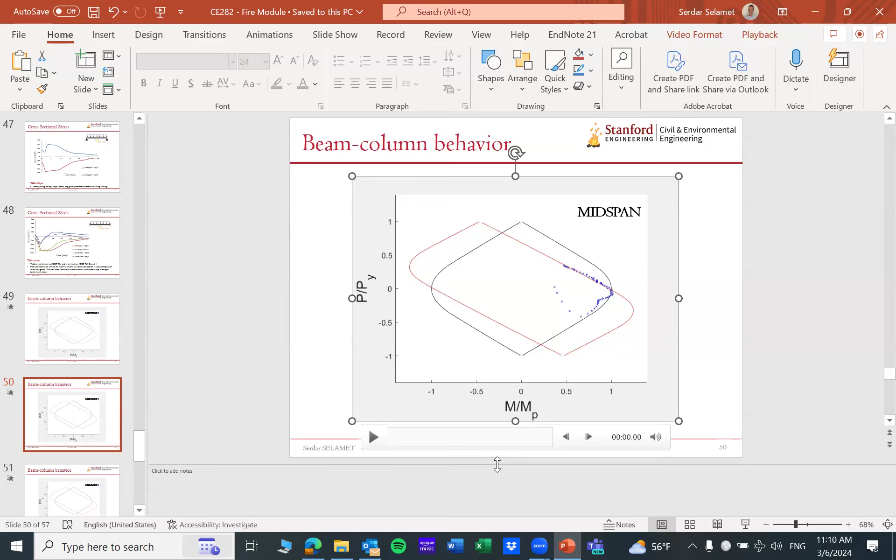Okay, so you see that increase in the axial load, because it goes down here, right? And then there will be also an increase of the bending moment capacity towards the right. So that dynamic you can see in this video quite clearly. And the last video that I will show is a fixed one that kind of traverses everywhere this time. And then you see it bumps into the capacity, so the deflections start changing, and then it goes to the other direction, and it kind of fails again at or around the red line here, over here.

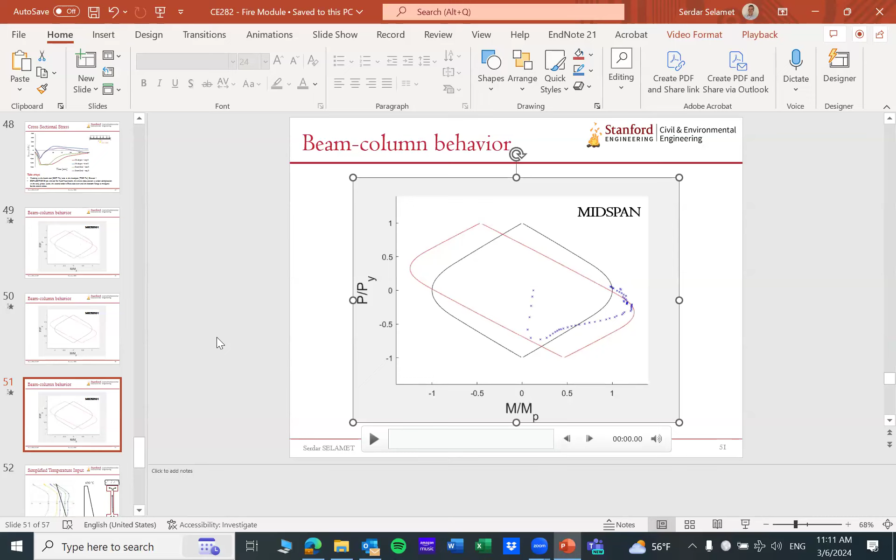Okay. So this is just the evolution of PM, and I think these normalized graphs tell us how much of a shift and dynamic behavior you get in this cross section. Dynamic meaning not dynamics in the structural sense, just that things are moving and changing swiftly, shifting from deflection type of behavior to strength type of behavior throughout the entire analysis. Any questions? Okay.

So what I will do here is give a brief outline of the assignment. Okay. So as I said, the heat transfer model is great. You can record the temperature throughout all the fibers, which could change. The thermal gradient can change. The distribution can change at every time step. But for this problem, we're going to assume, as before, a linear temperature gradient. So assume that we're just dealing with the end of the heating, with this blue line, okay?

And although this is the real temperature distribution, we're just gonna say, okay, this is the bottom flange, this is the top flange. We're gonna do a linear approximation, which is obviously not very correct, but we'll simplify this heat input, okay? So we're just taking the 30-minute end of the heating, and we apply a thermal gradient throughout the entire cross section. We assume it to be constant, and we assume it to be linear, the temperature distribution.

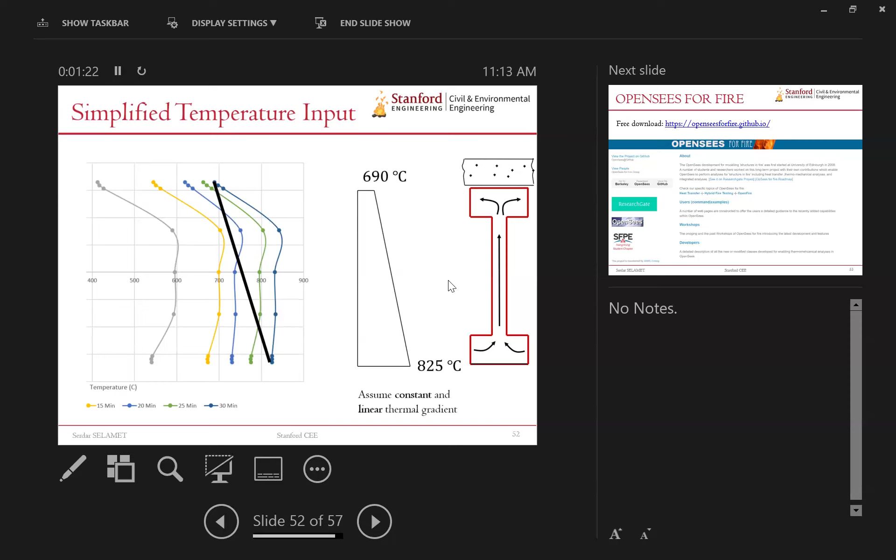And the temperature distribution is pretty much gonna look like this: 825 degrees Celsius at the bottom flange at the end of the heating, at the end of the analysis. And at the end of the analysis, we're gonna end up with 690 degrees Celsius at the top flange, okay? So these are the assumptions that we will make.

Let me hide this. Okay. Let's run this. We got another 5 minutes or so. I can just run the first one and show you how it's done, and then maybe on Friday we'll go with the load utilization ratio as well as some cooling effects. Okay.

So these two things are the same. We're just running. We're wiping the model. You see there's something that you need to do in your code. You need to create a for loop or just create multiple nodes, not just 2 nodes now. You need to create 11 nodes because you have 10 elements, you have 11 nodes, okay? So here's a change. Here's the boundary conditions. Now we're gonna start with pin roller.

Okay, this stays exactly the same. Nothing is changed from the validation, okay? So we get the geometric transformation here. That stays exactly the same. It's an IPE 330. Nothing is changed here. Integration is not changed. Now, this part is changed, right? Now you're not having only one element, you're having 10 elements, so you're gonna create a for loop, or you're just gonna do 10 lines of coding, okay? So again, you can see the nodes, but you won't be able to see elements, but it is there.

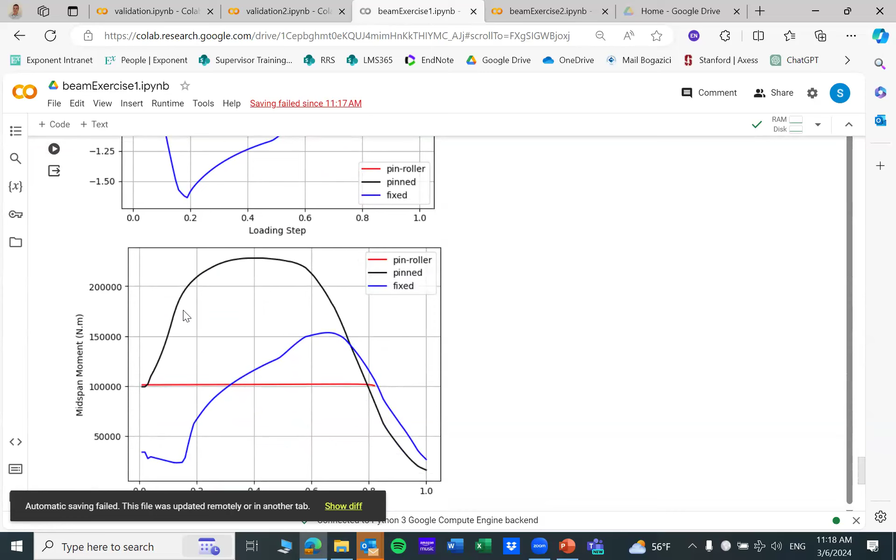And then on Friday, we'll do running for the pinned and fixed, and we'll do load utilization ratio. We're going to decrease that gravity load and look at the cooling effect as well. Sorry, I couldn't finish it. It will be extending to Friday, but hopefully that will give you a little bit of time to digest.